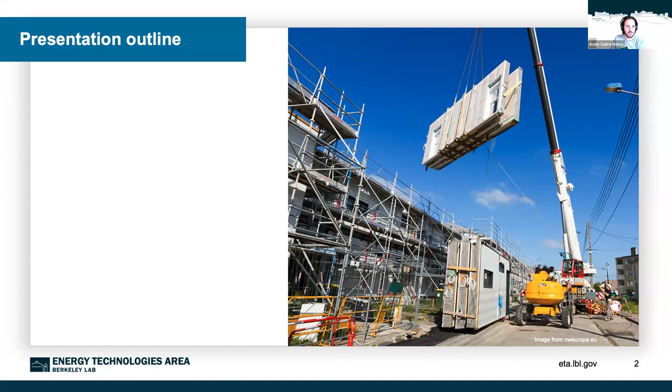My name is Aven Satre Meloy, is how you say that. And I'm a research scientist at the Berkeley Lab in the Building Technologies and Urban Systems Division. And today I'm going to talk, as Ted said, about industrializing construction and its role in increasing the speed and scale of building decarbonization. So just to give everyone a sense for where this presentation is headed, first I'll speak to some of the key buildings and construction sector challenges in the 21st century, and especially those that are relevant to the case of industrialized or advanced building construction.

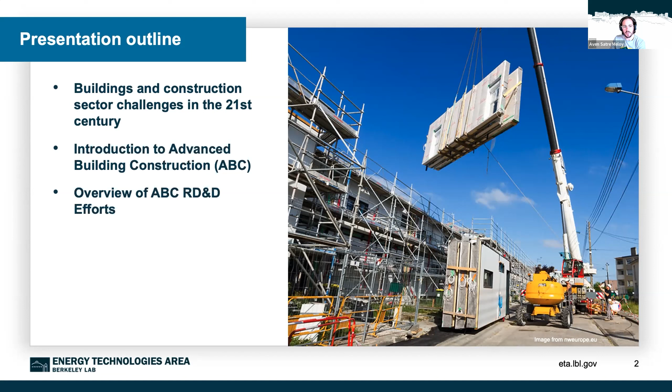And then I'm going to next provide an introduction to the Department of Energy's Advanced Building Construction Initiative, which was launched in 2019 and has grown since then. I'm going to provide an overview of some of the research, development, and deployment efforts that have been underway through the ABC initiative. And then I wanted to end with a preview of some of the forthcoming market guidance for residential buildings that has been developed by the ABC initiative to highlight a case study of how some of the work underway through the ABC initiative is going to hopefully lead to some market transformation and broader adoption of advanced building technologies in both renovation and construction markets. And then I'll end with some conclusions.

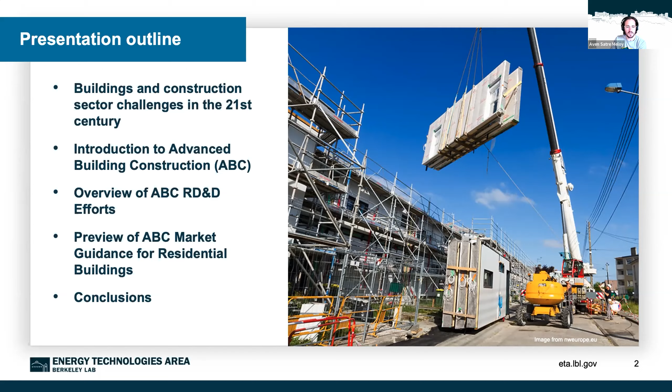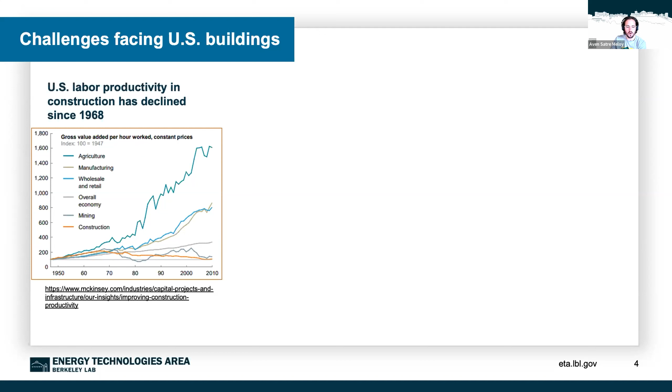So I wanted to start with a couple of the key buildings and construction sector challenges just to set the stage, and these will probably be familiar to folks, but I think they're really useful to articulate in the context of advanced building construction. So the first is this decline in labor productivity that we've seen in the construction sector over the latter half of the 20th century. This is a graph from McKinsey & Company that shows labor productivity in terms of gross value added per hour worked across a number of the key economic sectors in the US economy. And as you can see, the orange line here is the construction sector, and it has mostly stayed stable. It increased a little bit from 1950 to 1970, but then decreased through the latter half of the 20th century. And that's in stark contrast to a number of these other economic sectors that have seen pretty large gains in labor productivity. So that's one key trend and challenge for construction in the United States.

Thinking more globally, another challenge, and some folks may have even heard this statistic before, the global building stock is expected to more than double in area by 2060. So over the next 35 years, the Global Alliance for Building and Construction estimates that around 2 trillion square feet of new and rebuilt buildings will be constructed in cities worldwide. That's the equivalent of adding the entire building footprint of New York City every 35 days for the next 35 years. So it's a pretty considerable challenge to meet that new construction demand.

And then again, looking specifically at the US market, annual retrofits in the US fall far short, both in quantity and the depth that's needed to meet the US's decarbonization goals. Really only about 2% of commercial building space and less than 1% of homes undergo energy improvements each year. These improvements are typically surface level. They rarely surpass 30% energy savings, so they really couldn't be considered deep energy retrofits. And I think most importantly, these comprehensive upgrades really don't appeal to consumers. They're either too costly compared to their perceived value, they're too slow, they're too burdensome, they lead to inconsistent performance, and there hasn't been a strong market signal of demand from consumers for these types of whole building deeper retrofits. So I'm just going to provide a bit more context for each of these challenges on the next slides.

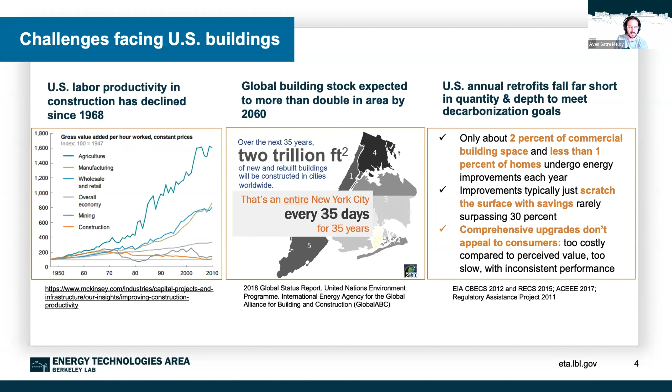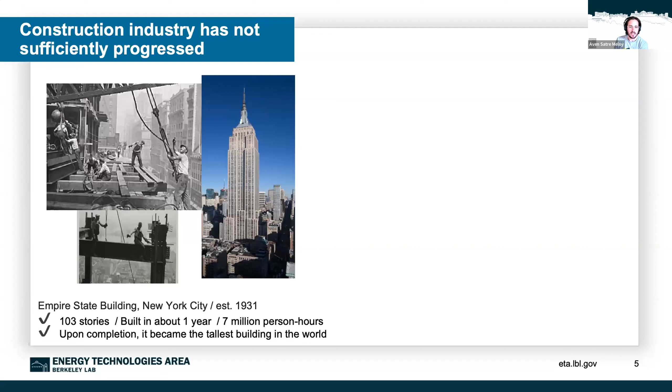So first, regarding the construction industry's flagging progression over the 20th century, this is a couple of pictures of the Empire State Building and its construction in around 1931. It was the tallest building in the world when it was built, at 103 stories. It took about a year to build and around 7 million person hours. And if we fast forward 80 years to the construction of the Burj Khalifa, shown here in Dubai, this was around 2010, it was 163 stories tall, so not quite twice as large as the Empire State Building, but almost. And it took about 6 times as long to build in terms of years, and about 3 times as many person hours, 22 million, to complete.

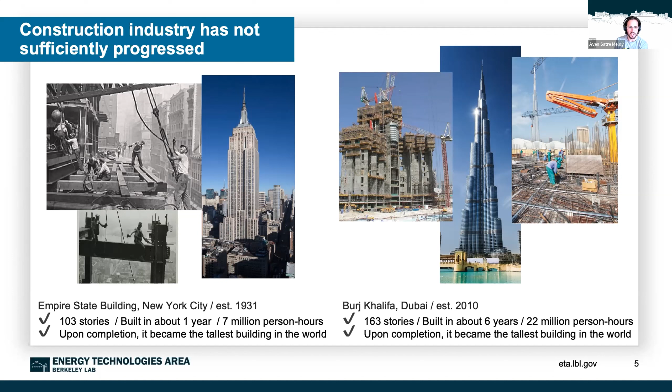And when it was finished, it became the tallest building in the world. And so this just sort of shows the lack of progress and efficiency in the construction sector over the 20th century and the early 21st century, whereas we've seen pretty strong changes in other economic sectors as a result of innovations in those sectors.

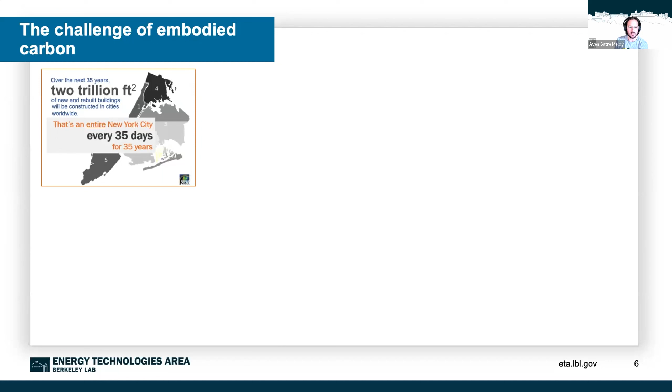Regarding the stat that I shared earlier about the growth of the building stock over the next 35 years, which is a considerable challenge for many reasons, but one that I think is more relevant to our field is the challenge of embodied carbon. And so for folks who aren't as familiar with embodied carbon, it refers to the carbon that is emitted through the production, construction, manufacturing, the demolition and disposal of buildings.

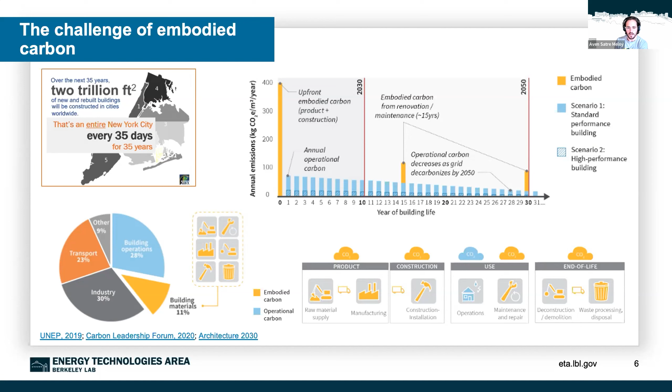But I think importantly, as operational carbon decreases over the next 20 to 30 years, which we expect it will, because the grid is going to decarbonize, and increasingly we'll see buildings switching to electric fuels or using non-electric low carbon sources of energy, the operational phase of buildings will lead to fewer emissions, and building materials or embodied carbon will increasingly account for a larger share of emissions. And so I think it's important to keep that in mind, that this is a growing problem, and one that is really important to think about developing solutions for.

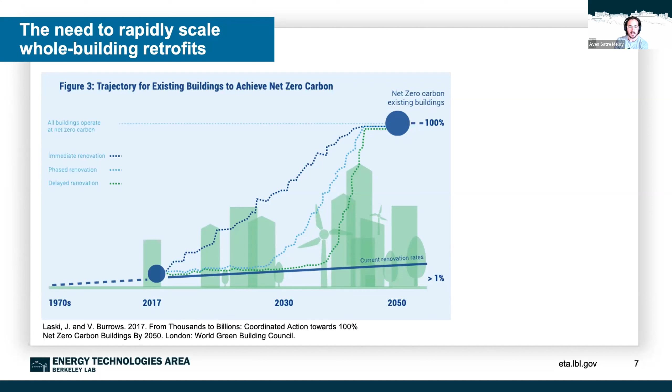And then finally, I mentioned the need for rapidly scaling whole building retrofits. This is from the World Green Building Council, and it's a pathway they developed for existing buildings to achieve net zero carbon. They find that current renovation rates, as I said, really are around 1% or less of the existing building stock each year. And when we're talking about really whole building, high performance retrofits, those are probably around 0.1% or less of the existing building stock each year. And that, of course, differs depending on which region you're looking at.

But to achieve building sector decarbonization by 2050, these rates must increase to around 3% per year if we start in 2017, which we obviously haven't. This report came out, I think, in the end of 2016. And the longer we wait to start this effort, the higher those rates must increase. So that just indicates that, like in many cases for building or broader decarbonization, the longer we wait, the faster we have to change.

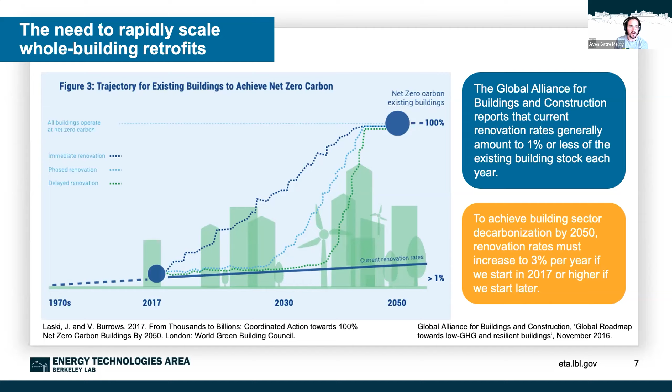Okay, so those are just a bit more context on some of these challenges, and I think that they really are relevant to advanced or industrialized construction, which I'm going to provide a brief overview of now. So the U.S. Department of Energy launched the Advanced Building Construction Initiative in 2019 with funding for R&D projects at the national laboratories and a couple of other academic institutions. And since then, over the past 3 years, the Advanced Building Construction Initiative has really built this kind of far-reaching, industry-facing work that tries to influence the uptake of ABC or industrialized solutions.

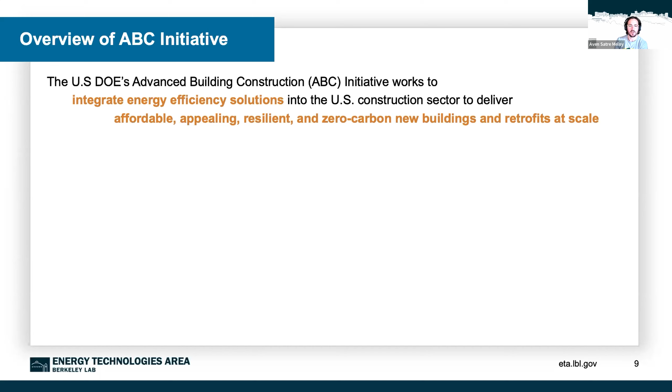So here's the mission statement for the ABC initiative. It works to integrate energy efficiency solutions into the construction sector to deliver affordable, appealing, resilient, and zero carbon new buildings and retrofits at scale. And I think the unique thing about the ABC initiative is that it includes both a research and development arm, which aims to innovate and validate building technologies and systems to achieve carbon neutrality for many different building types, but also includes a focus on market transformation. So thinking about how we can more broadly adopt these types of technologies in the construction sector.

And the primary vehicle for this is the ABC Collaborative, which is an industry consortium led by the Rocky Mountain Institute and some other organizational partners that really focus on trying to deliver the research work of the ABC initiative that's happening at national labs and academic institutions to industry audiences in order to inform product design, to help aggregate demand for these types of innovations, to reduce the risks of deploying them, and then also to establish competitive business models for these new approaches.

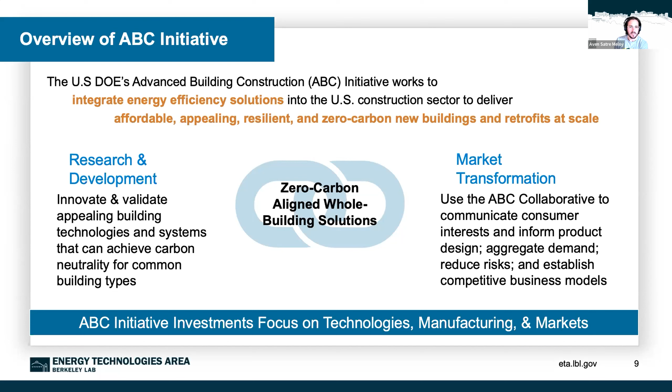And folks might be familiar with Energiesprong, which is an initiative in Europe that has pioneered the use of these technologies. And so these as well fall under the broad umbrella of ABC. And so this is not an exhaustive list, but just gives folks a sense for the types of innovations that we're thinking of when we think about advanced building construction.

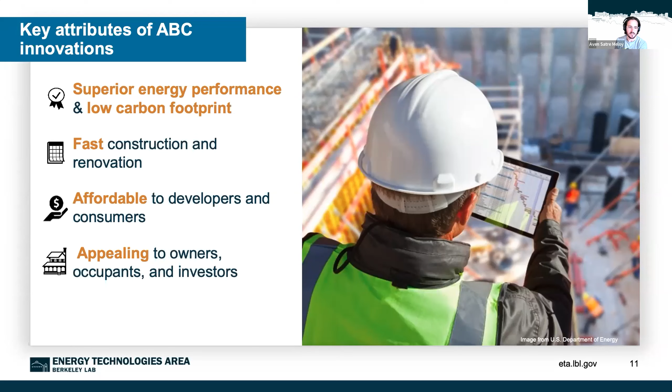And then finally, as I mentioned in the beginning of my presentation, the lack of consumer appeal for many of these products, well, it's a goal of the ABC initiative to make these products more appealing to owners and occupants and investors, simply because they work better, they're improved technology, and they improve occupants' experiences as well.

So I'm just going to provide a brief overview of some of the key ABC RD&D efforts that have been underway to date. And again, this is not an exhaustive list, but should give folks some sense of the type of work that ABC has been cultivating over the past couple of years. And I think the most exciting area of focus for the Department of Energy has been funding to accelerate the development of these technologies in national laboratories, in academic institutions, and through private-public partnerships for different participating organizations.

And so this is one area of activity for the ABC initiative, this federally funded activity. And that's really creating a lot of innovation and a lot of sharing of these ideas, both with industry as well as with the national laboratory community.

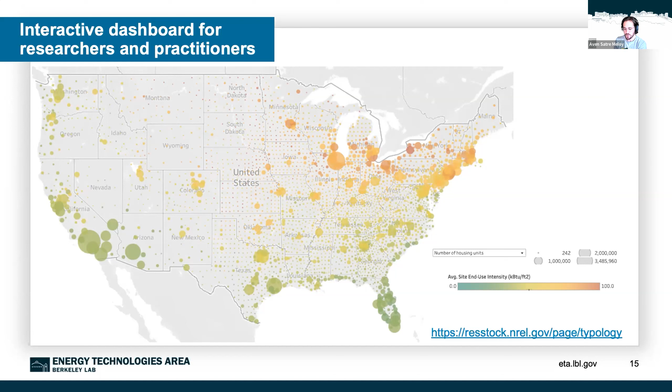And one of the things that I wanted to close with here is just a preview of some forthcoming market guidance for industry that's focused on residential buildings. So what we've done is we've used these kind of baseline characteristics of the building stock, and we've looked at a variety of different upgrade performance levels for both new construction and retrofits to try and understand, can we say, in different regions and different states, what types of buildings should receive which types of upgrades in order to be net zero ready or net zero compatible?

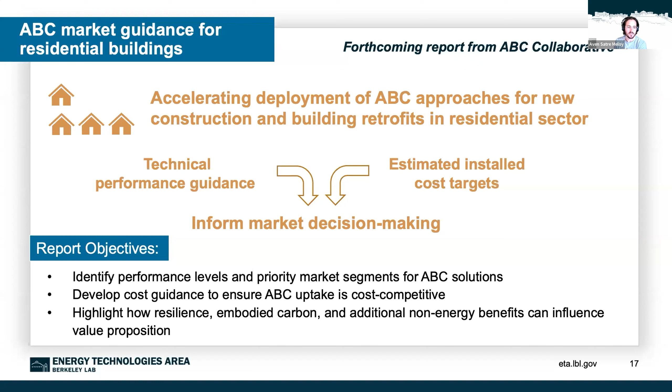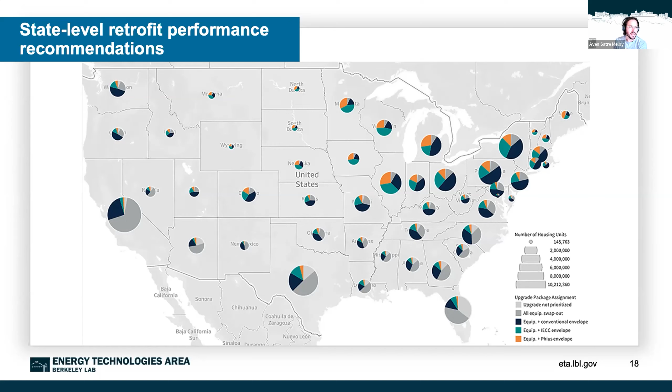So I can't say much more about that now because I think I'm nearing the end of my time, but there's lots of interesting stuff happening within the ABC initiative, and we are working on both the innovation side and on the market deployment side, and there's lots of ways to get involved.